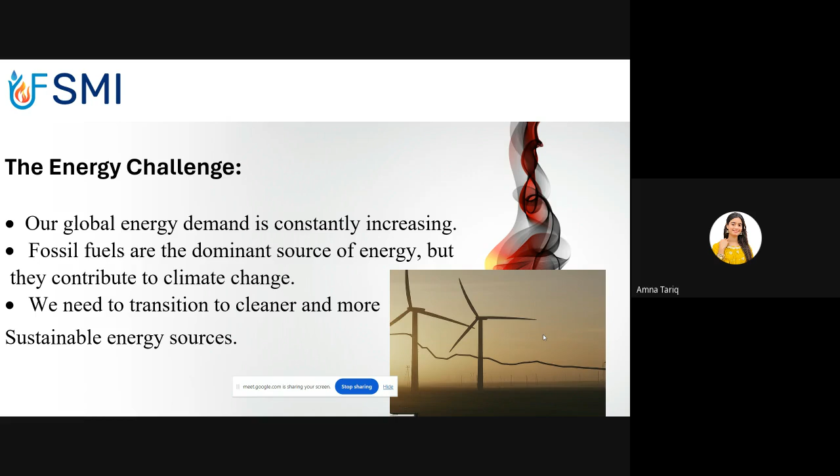Energy storage. Okay, so what is energy storage? Chemical, thermal, mechanical, and nuclear are the primary methods of storing large amounts of energy. Chemical energy is stored in petroleum, biomass, and chemical compounds and elements. Thermal energy is stored in mass as

latent heat and sensible heat. There are several important considerations when storing energy. Number one, the ability to recover the stored energy, the rate at which the stored energy may be converted, and the rate at which stored energy decays. The ability to convert stored energy limits the form of energy that may be utilized in each technology.

But the stored nuclear energy in gasoline cannot be converted to other forms in any simple manner. The rate at which energy can be converted to another form is an important consideration when comparing various technologies.

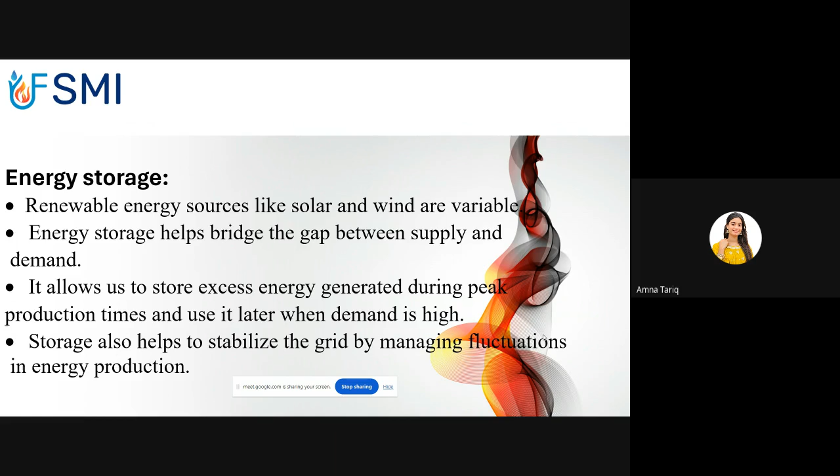Finally, energy cannot be stored indefinitely. Biomass contains substantial stored chemical energy, but this will decompose to a less useful material with time. Similarly, flywheels will lose energy due to friction. The rate of self-discharge is an important consideration in coupling energy storage technologies with energy conversion systems.

Okay, in this diagram, one second. Okay, in this diagram, self-discharge time of energy storage system. It shows how long various energy storage systems can hold a charge before losing it through self-discharge.

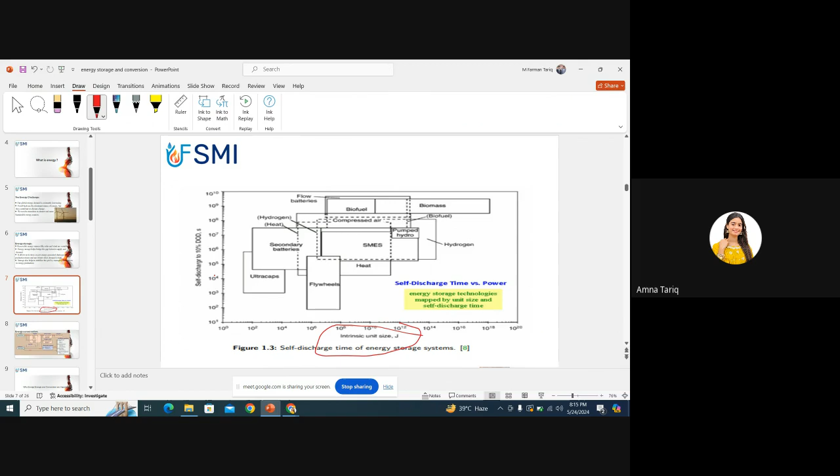Self-discharge is a chemical reaction that happens inside batteries and capacitors, even when they are not being used. The x-axis of the graph shows the intrinsic unit size, and the y-axis shows the self-discharge time in seconds to 10 percentage depth of discharge.

In this diagram we show flow batteries, and this is secondary batteries, and next this is pumped hydro, and this is ultra capacitors, this is flywheels, and this is superconducting magnetic energy storage. This is biomass, biofuel, biomass.

For example, lead acid batteries have a higher self-discharge rate than lithium ion batteries. The choice of energy storage system will depend on the application. If you need to store energy for a long period of time, then a system with a low self-discharge rate, such as pumped hydro or compressed air energy storage, will be a good choice. However, if you need to store energy for a shorter period of time and then release it quickly, a system with a higher self-discharge rate, such as a battery, may be more suitable.

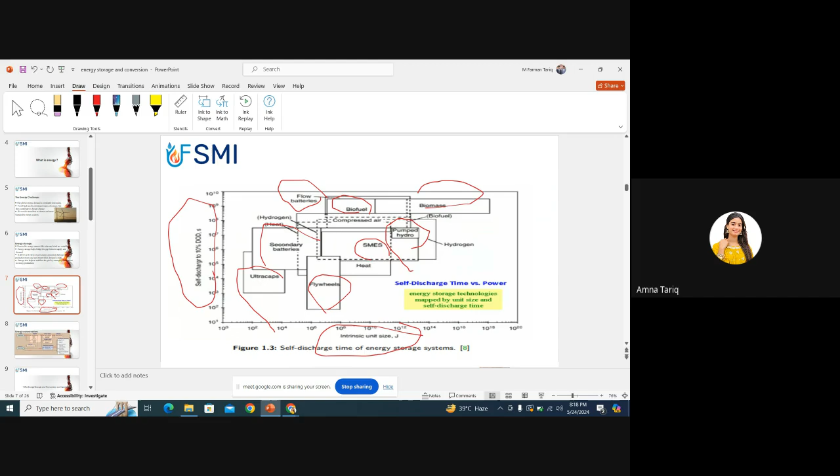Okay, so in this diagram, energy conversion. First we study what is energy conversion. Energy conversion, also called energy transformation, is the process of changing energy from one form to another. When energy changes from one form to another, this is energy conversion, because we know that energy cannot be destroyed — it only changes from one form to another. For example, mechanical energy converts to electrical or thermal energy. This is changing energy from one form to another, not destroying it.

Let's take an example to understand energy conversion. Imagine you are riding a bike. You are using chemical energy stored in the food you eat to move your muscles. As you pedal, that chemical energy is converted into kinetic energy that makes the bike move. When you apply the brakes to slow down, the kinetic energy is converted into heat energy through friction between the brake pads and the wheels.

Everyday examples of energy conversion: chemical energy in gasoline is converted into heat energy during combustion, which then expands gases in the engine and creates mechanical energy to move the car. The potential energy of falling water is converted into kinetic energy as it moves through turbines, then converted into electrical energy by the generator. Sunlight is converted into electrical energy through the photovoltaic effect. Chemical energy stored in a battery is converted into electrical energy to power your devices.

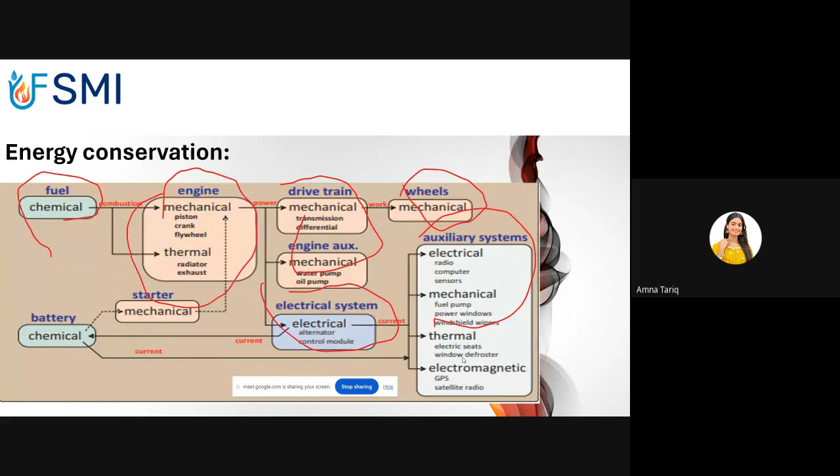So next is why energy storage and conversion are important. Can anyone answer this question now?

Hello, Miss Amna, I just want to ask a question from the previous slide. Can you go back to the previous slide? I just want to ask a question from the previous slide.

First of all, we have fuel, and in fuel we have chemical energy. After combustion, this chemical energy goes to the engine, and there is some kind of mechanical work. There are three parts: piston, crank, and flywheel. Would you like to tell me something about the flywheel? What is meant by flywheel, and what is the main purpose of flywheel?

Okay, actually a flywheel is a mechanical device designed to efficiently store rotational energy. It typically consists of a heavy wheel or disc that can spin around an axis. The primary function of a flywheel is to smooth power output and provide continuous energy when the source of power is intermittent.

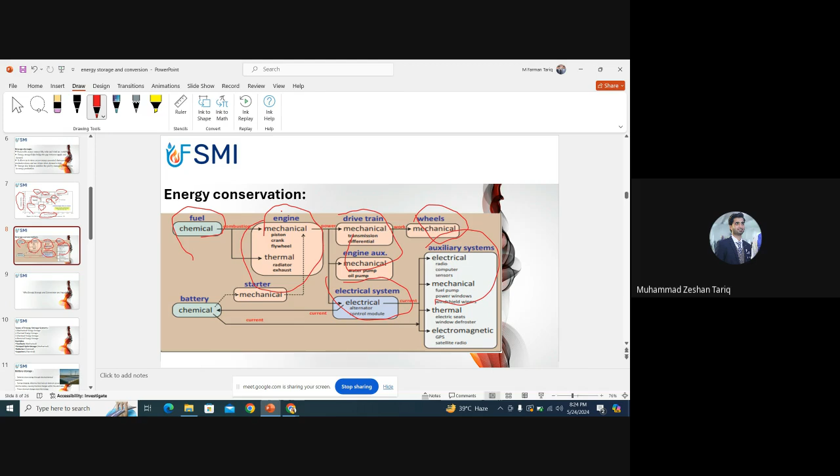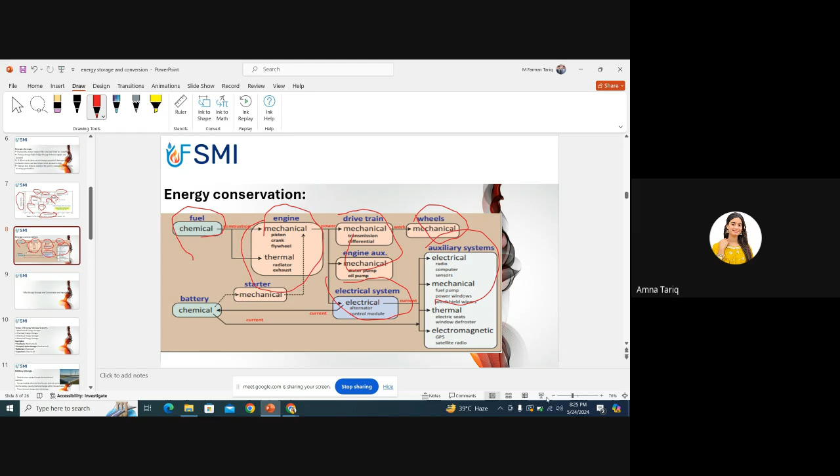Okay, so it means you want to say that the flywheel is converting rotational motion into translational motion? It is converting rotational energy into translational energy. Am I right? Yes, you are right. Okay, thank you so much. Welcome. Any question?

Okay, so next is why energy storage and conversion are important. Can anyone give me an answer to this question now?

Energy storage and conversion are critical for several reasons, impacting various aspects of modern life and addressing several global challenges. For example, solar panels generate electricity only when the sun is shining. This means there is excess energy during sunny days and a shortage at night or on cloudy days. Energy storage systems such as batteries allow us to store excess energy produced during the day and use it when the sun is not shining. This ensures a consistent energy supply.

Electricity grids need to maintain a constant balance between supply and demand to function correctly. Energy storage systems like lithium-ion batteries can quickly discharge stored energy to stabilize the grid during peak demand periods or when there are unexpected outages.

Wind turbines generate electricity when the wind blows, which can be unpredictable. Energy storage systems can store excess energy generated during windy periods and release it when the wind is not blowing. This allows for higher integration of renewable energy sources into the grid, reducing fossil fuel use and lowering greenhouse emissions.

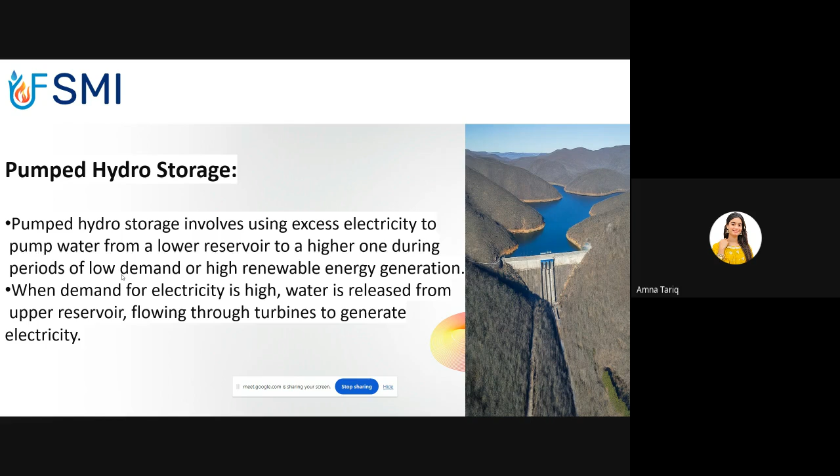Next is compressed air energy storage. This system stores energy by compressing air into an underground reservoir. When electricity is needed, the compressed air is released, heated, and expanded through a turbine to generate electricity. Compressed air energy storage uses a thermal energy storage unit to store the heat generated during compression, then transfers that heat back to the air during the expansion process, making it more efficient than conventional methods.

Let's look at the components of compressed air energy storage. First is the compressor, which uses electricity to compress air from the atmosphere; this compression process generates heat. Next is the heat exchanger, which transfers the heat generated during compression to the thermal store.

Next is the thermal store, which stores the thermal energy from the compression process and heats the air before it enters the expander. The expander expands the heated air, which drives a turbine to generate electricity. Finally, the exhaust air is the air that exits the turbine after it has been expanded to generate electricity.

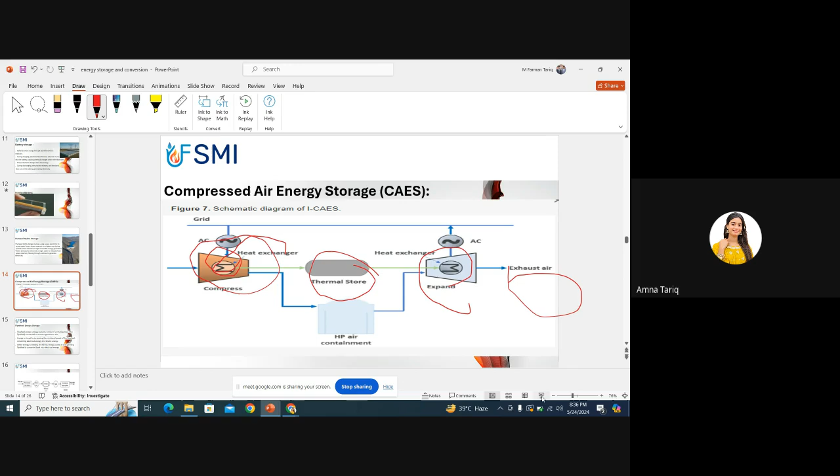Now next is flywheel energy storage.

Flywheel energy storage is a kinetic energy storage system that utilizes the energy of a rotating mass to store and release energy efficiently. The fundamentals of flywheel energy storage involve storing and releasing energy, along with its advantages and limitations.

A flywheel storage system consists of a rotating mass connected to a motor generator unit. Energy is stored by increasing the rotational speed of the flywheel, converting electrical energy into kinetic energy. When energy is needed, the kinetic energy stored in the spinning flywheel is converted back into electrical energy. Next, let's look at how it stores and releases this energy.

During periods of low energy demand or excess generation, electricity is used to spin up the flywheel, increasing its rotational speed. The kinetic energy is stored in the rotating mass of the flywheel, ready for rotation. When electricity demand increases or there is a shortage of supply, the spinning flywheel acts as a generator. The rotational energy of the flywheel is converted back into electrical energy using the motor generator unit, providing power to the grid or specific applications.

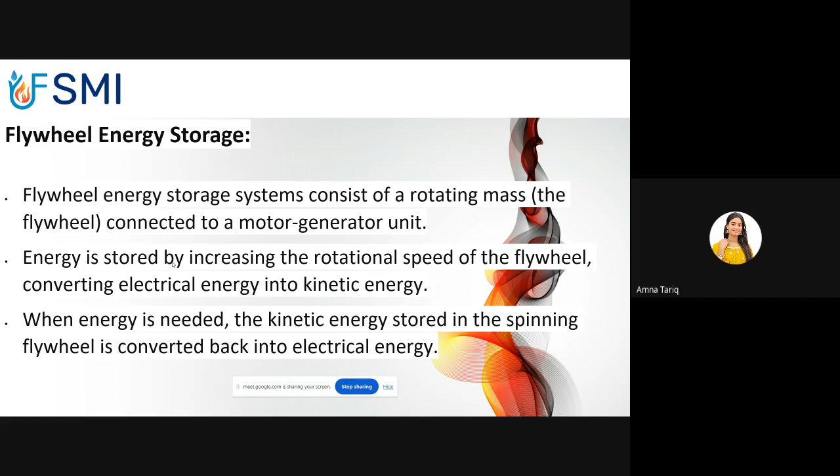Let's take an example to understand the flywheel energy storage system better. For example, Beacon Power operates a flywheel energy storage facility in Stephentown, New York, USA. The facility utilizes flywheel technology to provide frequency regulation services to the grid, helping to maintain grid stability and reliability. It demonstrates the rapid response and high efficiency of flywheel energy storage systems in providing grid support services.

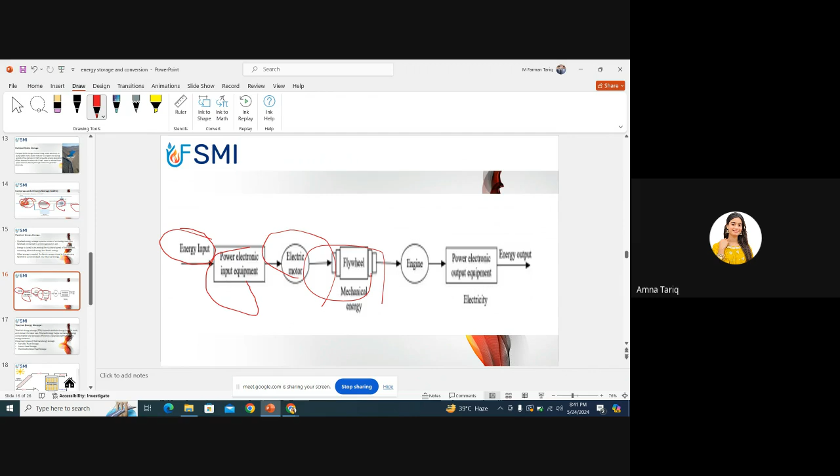This is the electric motor. This term is not commonly used in power plants; it's possible it refers to the overall conversion process from the energy source to electricity. So this is the flywheel. A flywheel is a rotating machine that stores kinetic energy. The flywheel is actually a main component in the design of the power plant because it stores kinetic energy, either storing excess energy generated or helping regulate the flow of power output.

Now we get mechanical energy. This refers to the rotational energy of the flywheel. Last is the power electronic output equipment. This equipment converts the electrical energy from the flywheel or the generator into a usable form for distribution, likely referring to a transformer that steps up the voltage for transmission.

Step up means high voltages, step down means low voltages. In the transmission sections, both step up and step down are present. When we want to use high voltages, we use step up, and when we want low voltages, we use step down.

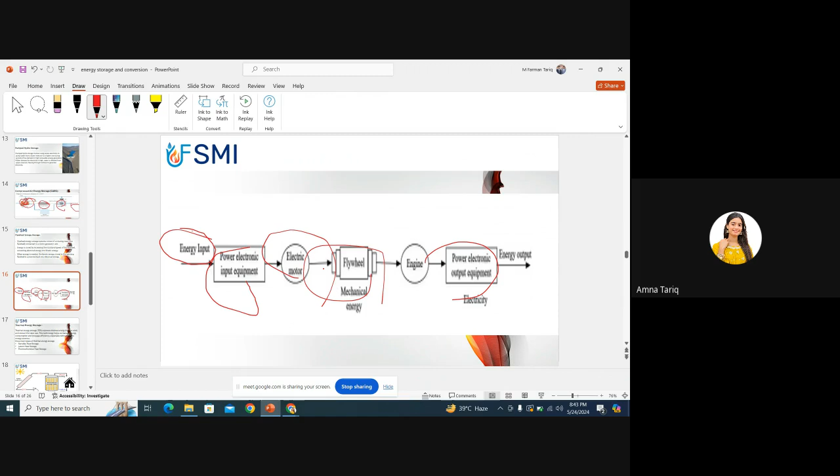Next is thermal energy storage. Thermal energy storage captures thermal energy and stores it for later use. This technology helps us manage energy consumption and increase efficiency, especially with renewable energy sources.

There are types of thermal energy storage: sensible heat storage, latent heat storage, and thermochemical heat storage. Sensible heat storage is the most common type. It stores heat by raising the temperature of a material like water, rocks, or molten salt. Think of a large insulated water tank that heats up during the day and releases heat at night.

Last is thermochemical heat storage. This is a more complex method that uses chemical reactions to store thermal energy. Certain chemicals absorb heat and undergo a reversible reaction. The stored energy is released when the reaction is reversed, though this technology is still under development.

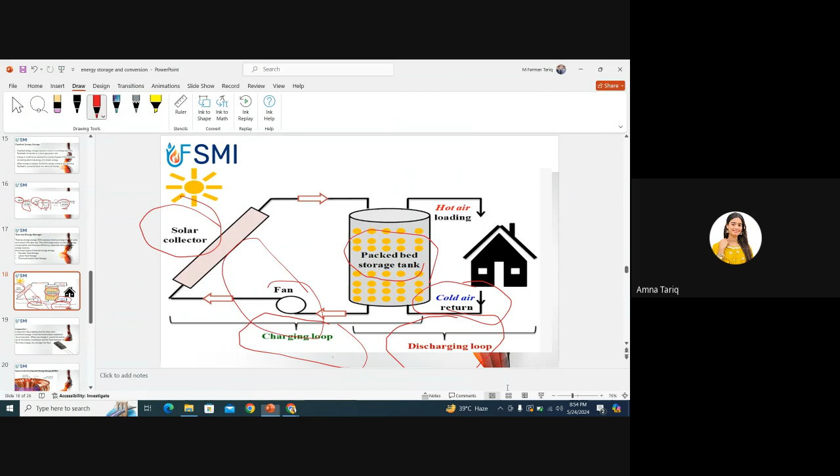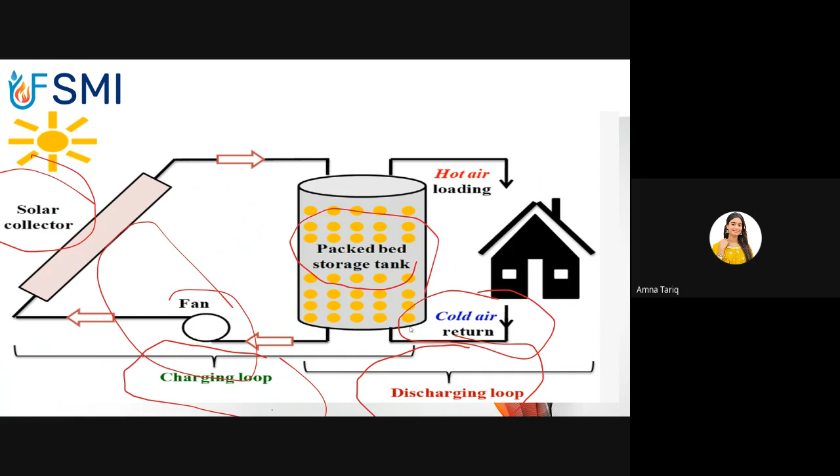Can you hear my voice clearly? Yes, ma'am. Okay, so next topic is capacitor.

We also know that a capacitor is a passive electronic component that can store electrical energy in an electrostatic field. It consists of two metallic plates separated by a thin insulated layer called the dielectric. What is the process of a capacitor?

As charging continues, the build-up of opposite charges on the plates creates an electric field across the dielectric. This electric field opposes further flow of current. When the electric field becomes strong enough to equal the battery voltage, the charging process stops. The capacitor is now fully charged, storing electrical energy in the form of the electric field between the plates.

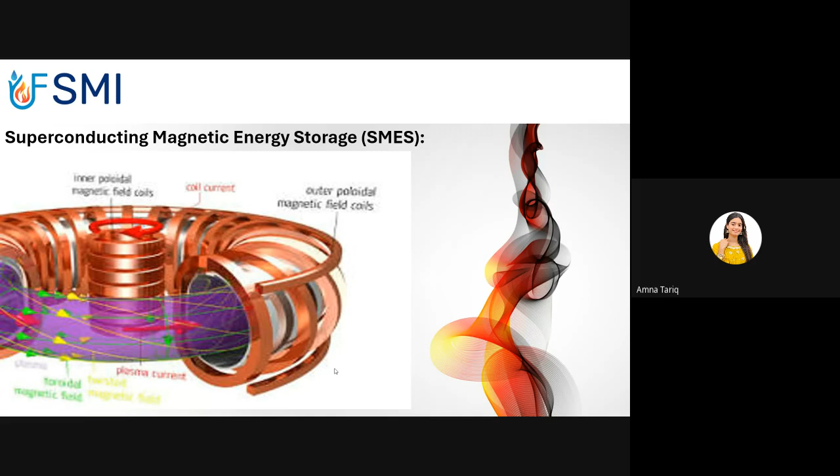Next is energy conversion technologies. In the previous session, we already discussed these technologies: photovoltaic solar cells, wind turbines, fuel cells, hydroelectric power, geothermal power, and biomass conversion. Now we will understand this technology step by step in short.

First, photovoltaic solar cells. PV solar cells convert sunlight directly into electricity through the photovoltaic effect. These cells are made of semiconductor materials like silicon. For example, solar panels installed on rooftops or in solar farms generate electricity by absorbing sunlight. This electricity can be used to power homes, businesses, or even entire communities.

Next is wind turbines. Wind turbines convert the kinetic energy of wind into mechanical energy, which is then converted into electricity through a generator. For example, wind farms consist of multiple wind turbines placed in areas with strong and consistent wind. This causes the turbine blades to rotate, spinning the generator and producing electricity.

Next, fuel cells. Fuel cells generate electricity through an electrochemical reaction between hydrogen and oxygen. They are highly efficient and produce electricity with minimum emissions. For example, hydrogen fuel cells are used in various applications, including transportation and stationary power generation, backup power for buildings, or telecommunications. Next is hydroelectric power.

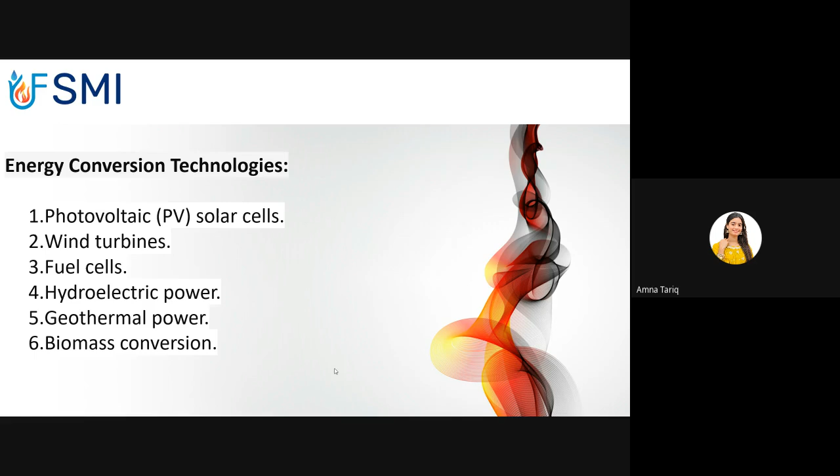Biogas produced from organic waste in anaerobic digestion can be used to generate electricity or heat. Okay, so these are technologies of energy conversion. Now, what are the emerging storage technologies?

Flow batteries, advanced supercapacitors, and solid state batteries are the three emerging storage technologies. First, flow batteries. These are a type of rechargeable battery where energy is stored in a liquid electrolyte solution that flows through a system of pumps and storage tanks. They offer scalable energy capacity, making them suitable for large scale energy storage applications such as grid storage.

Now we take one example to understand flow batteries. The vanadium redox flow battery is a common type of flow battery. It uses vanadium ions in different oxidation states to store and release energy. These are being used in various large-scale renewable energy projects, offering long cycle life and the ability to discharge energy for extended periods. The next technology is advanced supercapacitors, also known as ultracapacitors or electrochemical capacitors.

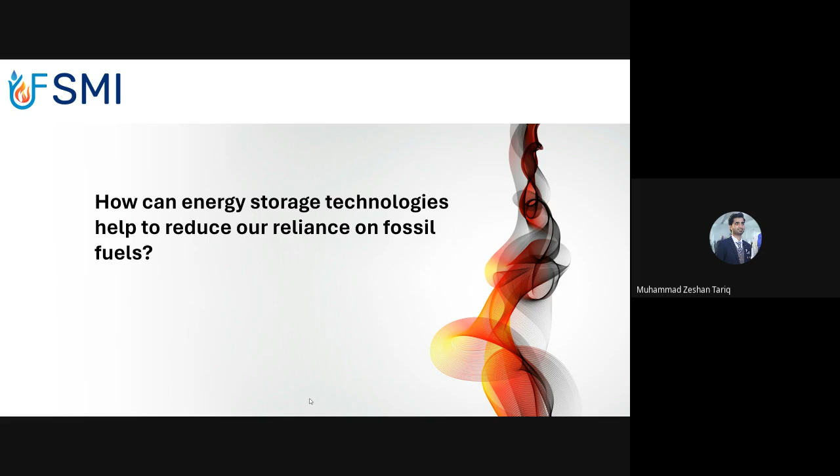by the use of humanity, for human purposes, these fossil fuels will be ended. That is why when we are using renewable energy resources, when we are using energy storage technologies, these technologies are helpful for the lesser use of fossil fuel.

And if the use of fossil fuel is less, then there will be more possibility to use these fossil fuels for a long time as compared to a short time. I think this will be a suitable answer for this. Yes, this answer is correct.

Okay, so now my session is complete. Any question?

I have joined, ma'am, I have joined your session. I think previously I joined your session, and now in today's session I have also joined it. First of all, I'm very thankful to you for such a nice presentation, and your way of communication, and all these slides are very helpful to understand the renewable energy technologies, and superconductors, and the discussion about batteries. A lot of concepts are cleared in today's class.